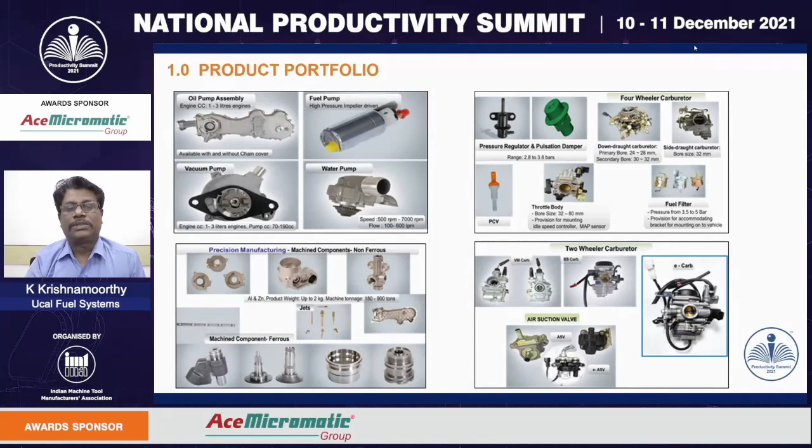With respect to two-wheeler, we are supplying carburetors, and recently we are supplying an innovative solution which is called e-carburetor. We are going to talk about the complete system in this presentation. In four-wheelers, we are there with almost all customers. In two and three-wheelers, we are with Bajaj, Hero and also Honda. These electronic carburetors, we are supplying to Bajaj.

Our team members: I am K. Krishnamoorthy, as already explained, heading operations, also one of the champions for this product. My colleague, Mr. Asokan, with me, is head of engineering, and Mr. Murugan, who has done an innovative product, is from R&D. Our valuable contributing team members are also given. Let us talk about the problem.

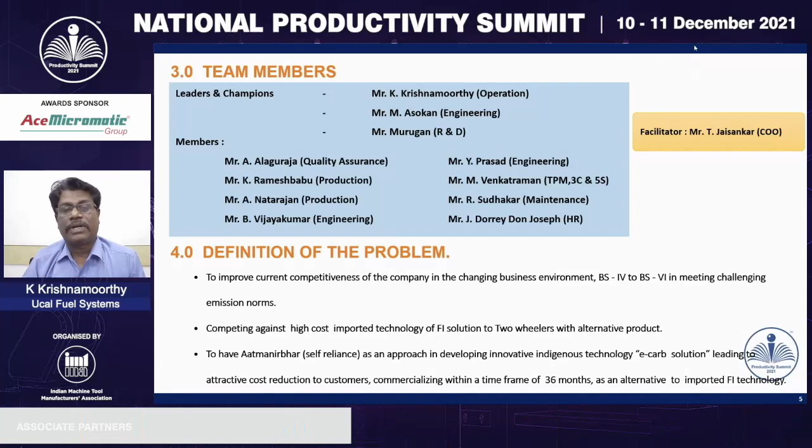To improve the current competitiveness of the company: the changing business environment from BS4 to BS6 in meeting challenging emission norms, competing against high-cost imported technology of FI solutions for two-wheelers with an alternative product, to have Atmanirbhar, self-reliance, as an approach in developing innovative technology for e-carb, leading to attractive cost reduction to customers, and commercializing within the given time frame, say 36 months. It is an alternative to imported technology.

The solution was implemented through product, process, and people. With respect to product, as I already informed, this is an innovative e-carburetor. It is a patented technology approved by ARAI, and the customer also accepted this technology. This product has been developed through various stages, right from quality function deployment, multiple environment over-stress testing, short-term and long-term endurance tests, and reliability engineering. Customer field proving and approval is also, of course, very important, which we have done.

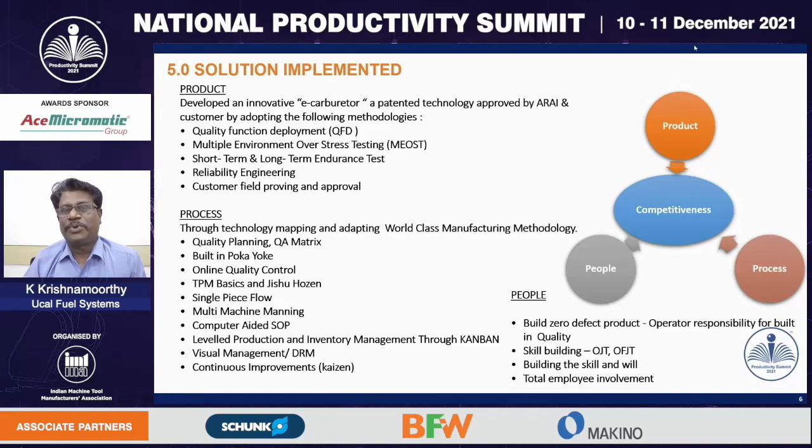With respect to process, all the product characteristics have been transferred to the process through our skilled engineering team. We started with quality planning, and we have also done a QA matrix, built-in poka-yoke, online quality control, TPM basics, specifically followed Jishu Hozen, single piece flow, multi-machine manning, and computer-aided SOP. We also did leveled production through a Kanban system and visual management. Of course, the DRM has played a major role in all the improvements, along with continuous improvements through Kaizen.

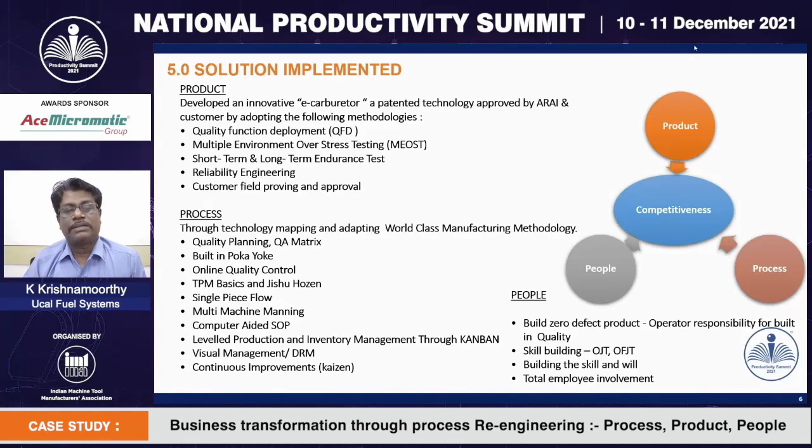With respect to people, skilled, trained people are very important. So we developed on-job and off-job training. A lot of manuals have been prepared for training the people. With respect to the value creation results achieved, we achieved excellent results in almost all measurables and all parameters. If we had not come out with the e-carburetor solution, Plant 6 would have been only 9.6 crores for the year, leading to non-viability of running this plant. So this project is life for us.

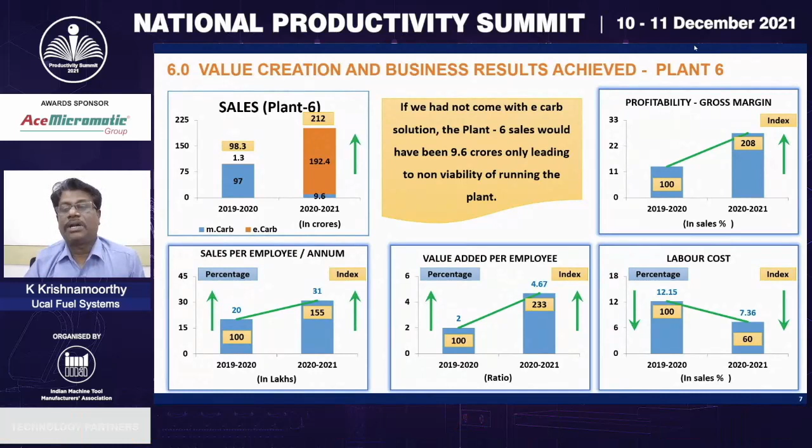So let us talk about the results. With respect to sales, we have gone from 97 crores in 2019-20 to 192 crores. It has almost doubled. With respect to profitability, I'm talking about the index, from 100 to 208, almost doubled. With respect to sales per employee, from 100 to 155, that is, from 20 lakhs per head we have improved to 31 lakhs per head.

Another significant result is value added per employee, which was 2, now it is 4.67. Our labor cost has come down drastically from 12.15 to 7.36. With respect to other parameters, customer line rejection, which is key for our company's business, we have reduced from 210 to 63.

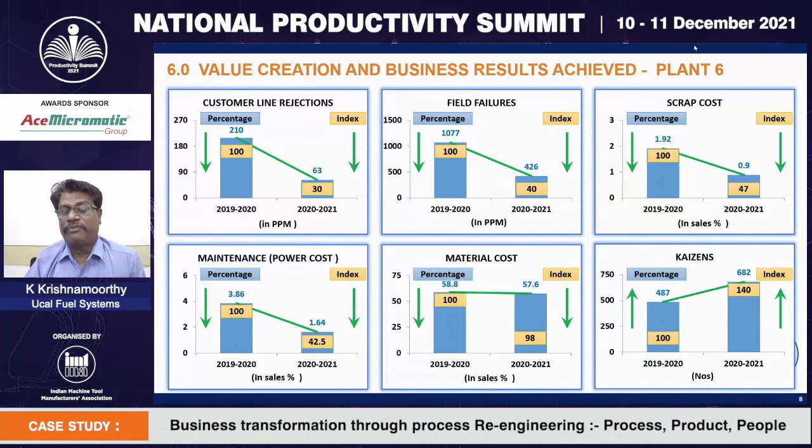Of course, the field failures have come down drastically. Scrap cost, one of the significant major reductions, was at 1.92%, almost 2%, and we have reduced it to 0.9%. With respect to maintenance, another significant improvement, reduction in power cost from 100 to 42.5, which is a very significant achievement. Of course, material cost has also been reduced.

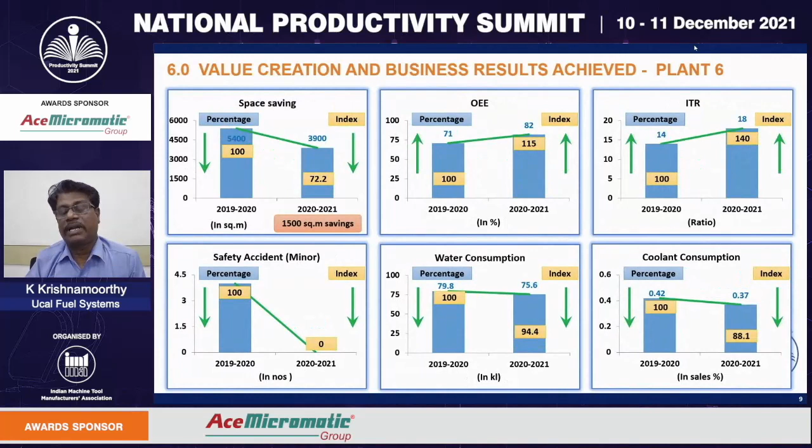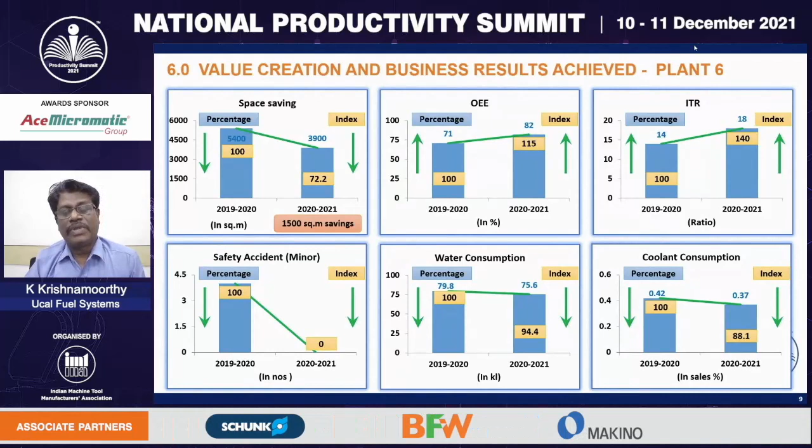All this improvement has been done through a number of Kaizens and space saving. We have saved about 1,500 square meters when we complete business re-engineering. Another significant improvement in OEE, from 71 we have gone to 82, ITR from 14 to 18, and safety almost zero—we have started monitoring near misses also. Water consumption and coolant consumption have also been improved.

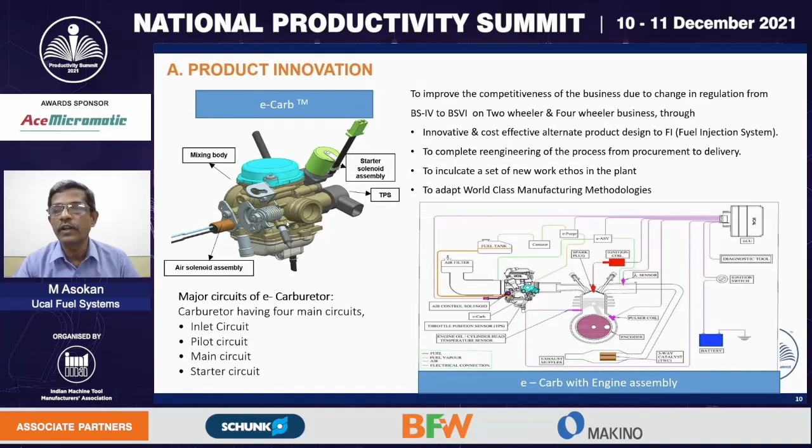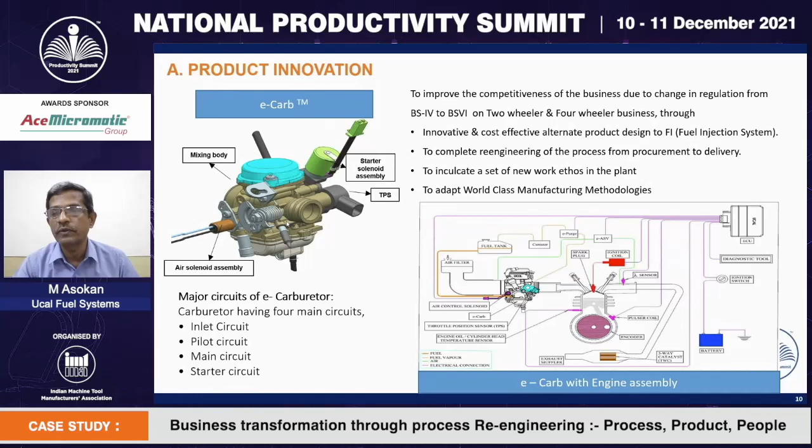This innovation was made a reality through an innovative and cost-effective alternative product design against a fuel injection system, with complete re-engineering of the process from procurement to delivery, inculcation of a new set of work ethos in the plant, and adaptation of world-class manufacturing methodologies. The air solenoid assembly is the key element in our electronic carburetors, fitted on the pilot air circuit to control the air-fuel ratio.

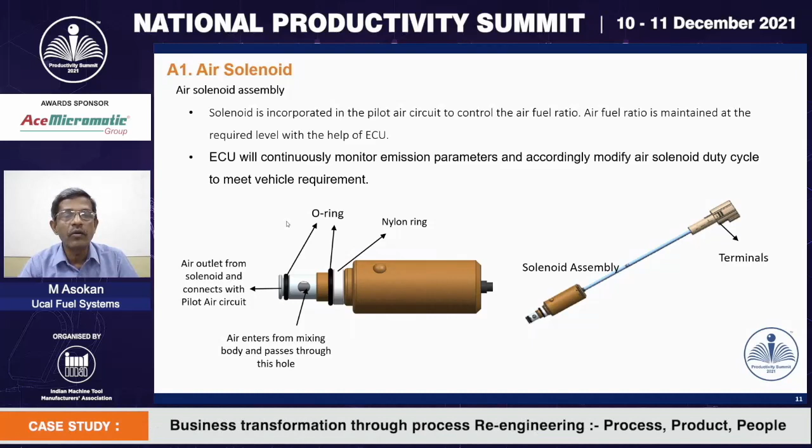The air-fuel ratio is maintained at the optimum level with the help of the ECU. The ECU continuously monitors emission parameters and accordingly modifies the air solenoid duty cycle to meet vehicle requirements.

Now, the comparison of electronic carburetors versus mechanical carburetors. The mechanical carburetors are made to meet BS4 norms, while the electronic carburetors are made to meet BS6 norms, and are also competitive with fuel injection systems. Fuel injection systems are more expensive compared to electronic carburetors, by around 30%.

The electronic carburetors are user-friendly in terms of servicing, as they have been in use for a very long period of time, whereas FI systems have multiple electronic sensors which make them complicated to service. As far as emission norms are concerned, we are at BS6, and we are happy to say our e-Carbs have met within 30% of the BS6 emission norms.

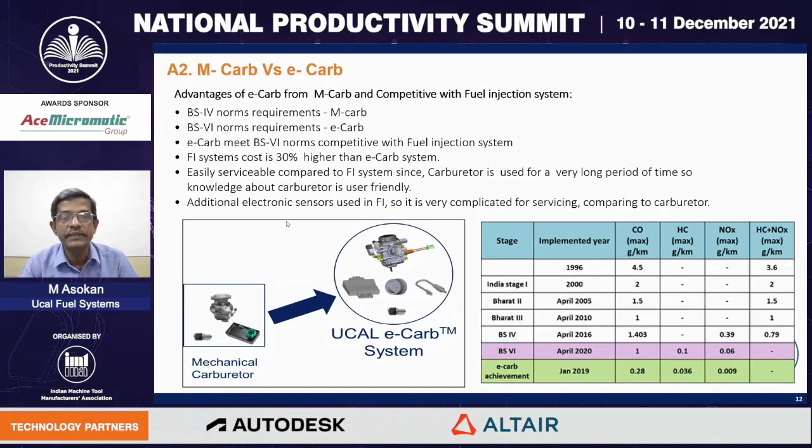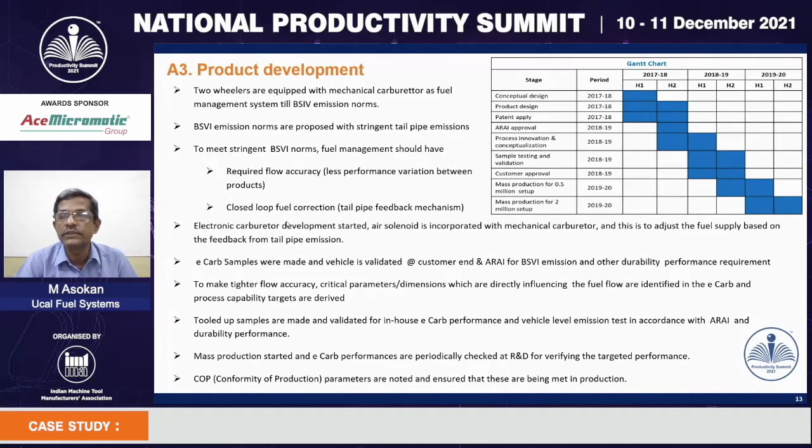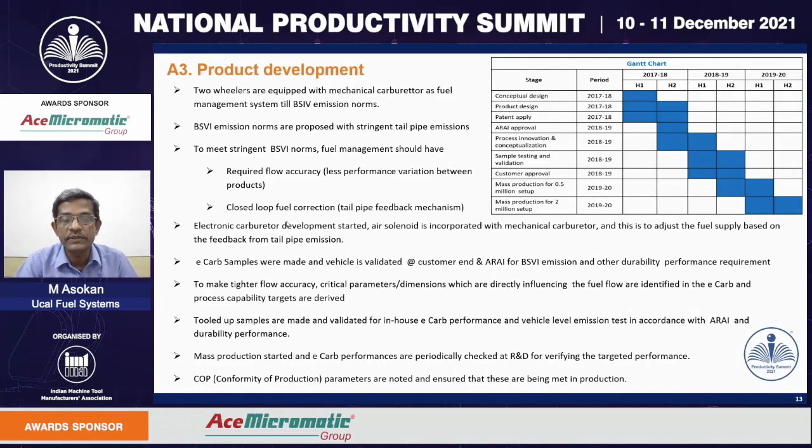As far as product development is concerned, we started our conceptual design during the first half of 2017-18, and completed the mass production setup with 2 million volume capacity in the second half of 2019-20, meeting the customers' quality, specifications, and ROI requirements.

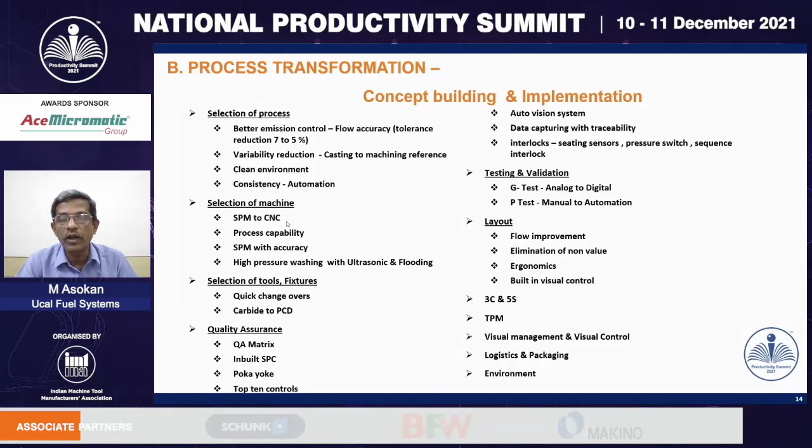As far as product process transformation is concerned, our focus was on selection of the right process, the right machines, and right toolings and fixtures, establishing the right quality systems, optimization of testing and validation protocol, and optimization of the layout. As far as selection of process is concerned, the key requirement was better emission control, meaning we had to reduce flow accuracy from 7% to 5%, which was there in our earlier mechanical carburetors.

This was achieved through various case improvements and process improvements. One of the process improvements was variability reduction in the casting-to-machining reference. In our earlier versions, we were taking casting as the datum for machining, which was resulting in inconsistency in process capability.

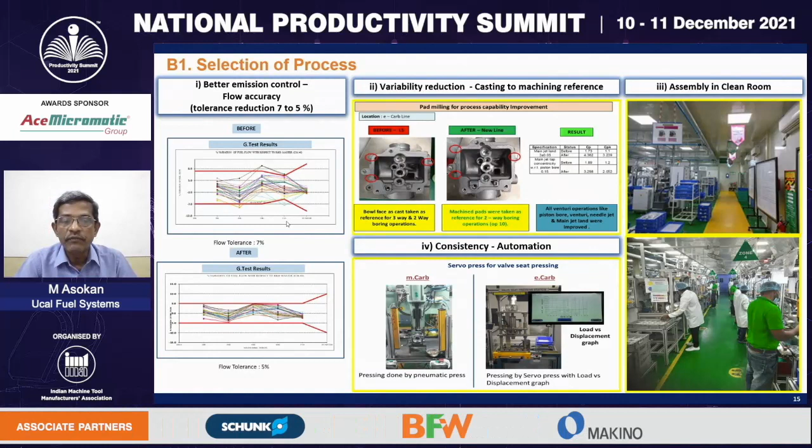In our eCarb, what we have done is take 3 reference points as the datum. We have done the machining, and that was used as the reference for subsequent operations. This has resulted in significant Cpk improvements. We have also ensured that assembly is done in a clean room, which ensures the right quality product is manufactured.

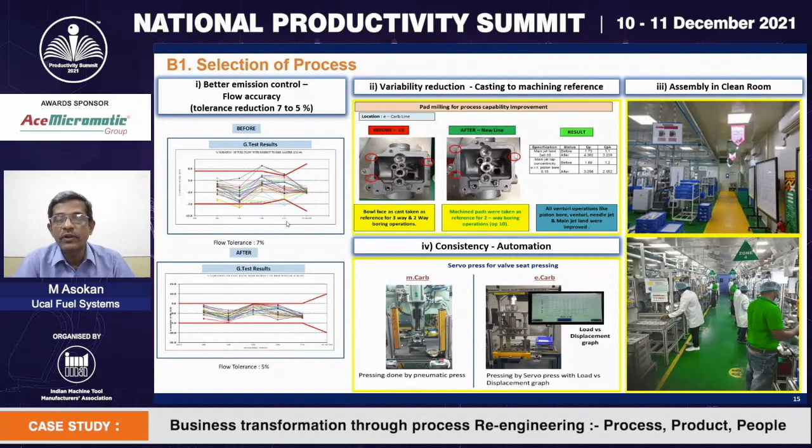In terms of the machine valve seat pressing operation, where load and displacement are very critical, earlier we were using a pneumatic press in which it was difficult to control the load and displacement. We have moved to a servo press in eCarb, by which we ensured that load and displacement are controlled, and we could also generate a load versus displacement graph.

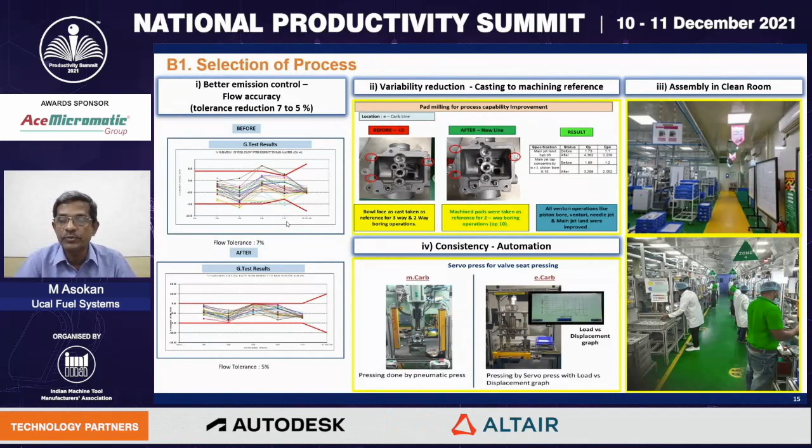The selection of the right machines. As far as machining is concerned, earlier we were using SPM machines. With SPM, the process was not flexible. Supposing the product becomes obsolete, we will not be able to use the machine for further product development. So consciously, we have gone for CNC version of machines in eCarb, which was very flexible, with quick changeover.

And wherever it is inevitable to go for SPM in assembly areas, we were using standalone SPM assembly machines. In fact, in one operation, we were using 3 different SPM machines for 4 operations. All these 4 operations were combined together into a rotary machine with auto part feeding. This has resulted in reduction of operator fatigue and improved productivity.

In fact, I have a small video I can show you.

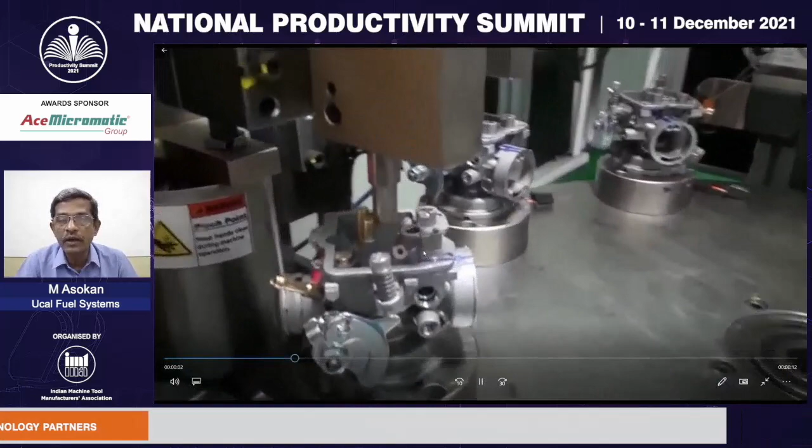Here what happens is only loading and unloading is manual. Everything else is automated, and the child parts are fed automatically. There are part presence sensors and multiple interlocks and poka-yoke features. This has helped in reduction of operator fatigue and improved productivity.

And all these improvements have significantly improved our process capability. In the table, we have listed 11 process and product parameters where significant improvement in process capability has been achieved, from less than 1.5 CPK to greater than 2.

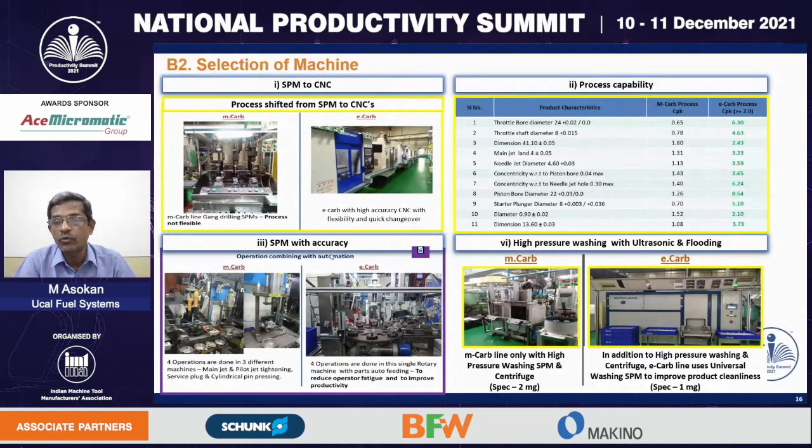As far as our final washing is concerned, earlier we were using only high pressure washing with a centrifuge, where we could achieve only 2 mg cleanliness level. We have introduced a universal washing machine with a flooding system followed by ultrasonic washing and a vacuum drying cycle, by which we could improve the cleanliness level to less than 1 mg.

As far as tool selection and fixtures are concerned, we have gone for tool life management with interlock, which ensures that the tools are changed at the right time and the right tool is selected. This has significantly reduced the tool change time.

And we have gone for a combination of tools. Earlier, we were doing multiple tools for different operations - for example, roughing, finishing, and face milling were done with different tools. All these 3 were combined together into a single combination tool. This has resulted in significant process parameter improvement and cycle time reduction, which has resulted in capacity improvement.

And as far as fixturing is concerned, we have gone for seating sensors with interlock, which has helped in prevention of a defective part from being produced.

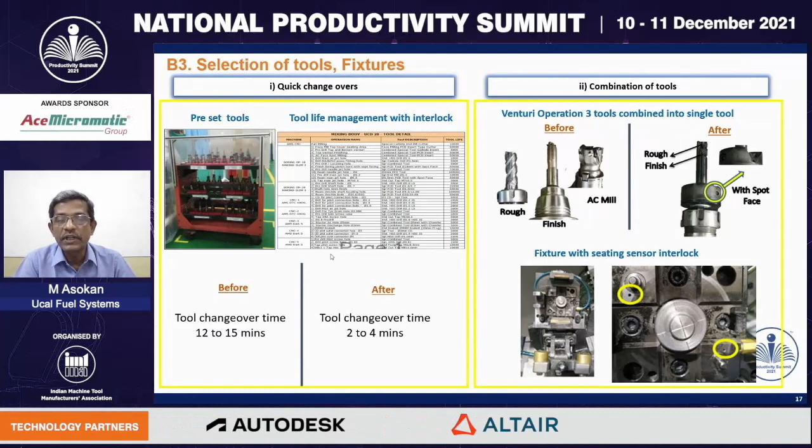With that, I'll hand it over to Mr. Krishnamoorthy, who will take it forward and conclude.

Thank you. Now let us talk about how our product quality characteristics have been transferred for quality assurance. We started with quality planning and the QA matrix. The complete process is deployed through the QA matrix system. We have done process characteristics wherever required, with inbuilt SPC, and more than 240 poka-yoke implemented throughout the manufacturing process.

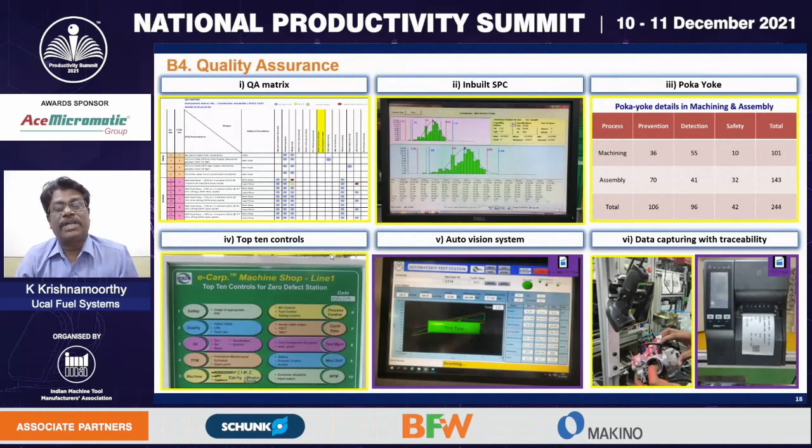One of the intuitive methods of controlling the process is the top 10 controls, starting from safety, quality, 5S, TPM, and machine management. We have also done process control, cycle time related issues, tool management, man-skill and material flow management. This is called top 10 controls, implemented at each stage.

And wherever manual reference or manual method of inspection existed, it has been transferred to automation. I'm just showing one video.

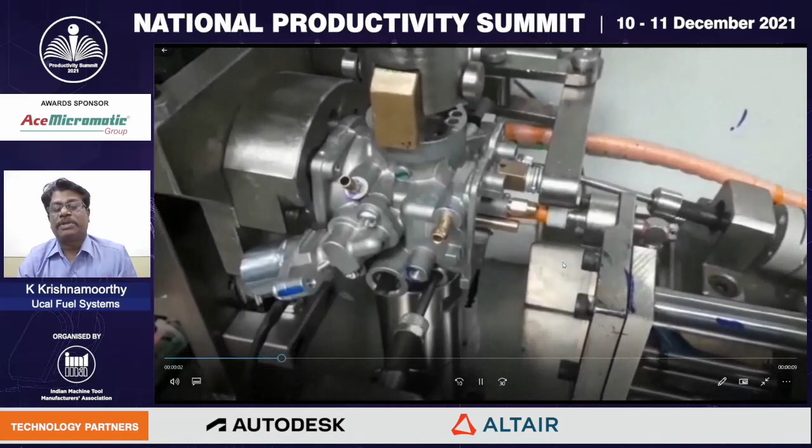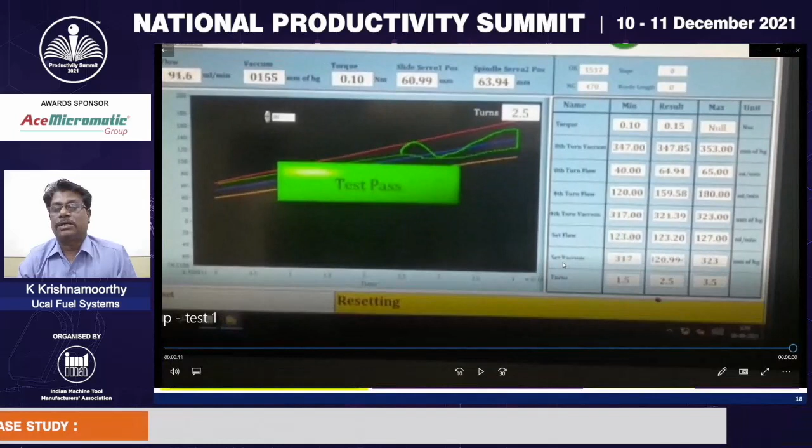Previously we used to adjust all the screws for flow measurement manually, and now this is completely automated - all the graphs and flow values are traced automatically, and the data is stored in the system. This is an excellent automation which has created value to the customer by not sending defective parts.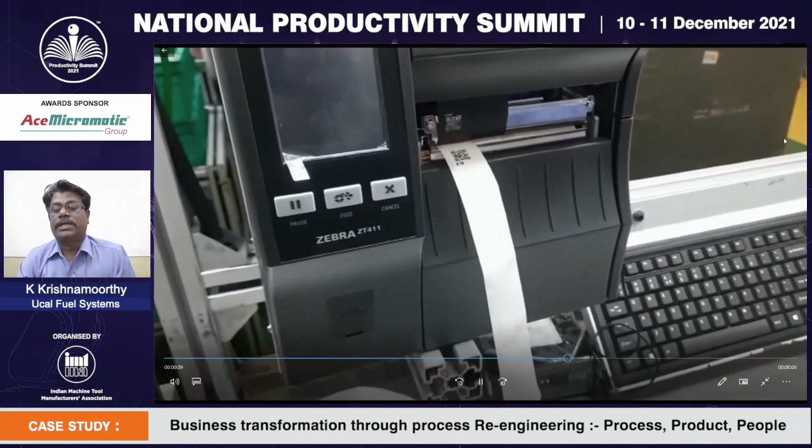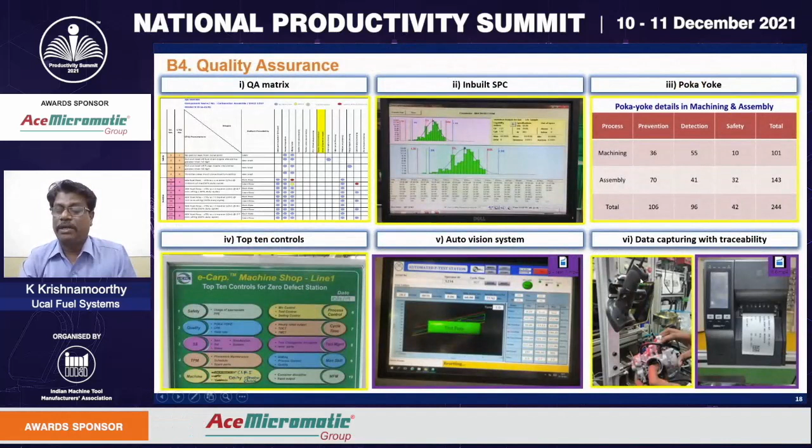All parts are getting passed, then a sticker is generated, and this sticker is pasted on the product, only then is it dispatched. So whenever we need to refer to anything, we just scan this QR code and can notice all the details. This is another excellent sub-project we have done in the process - of course, testing and validation was previously manual.

This we call it as P-test, and for our understanding, we can say it as idle testing. For idle testing, we used to do manual, now we have completely automated. And similarly, the final test before dispatching the part to the customer, the product is tested

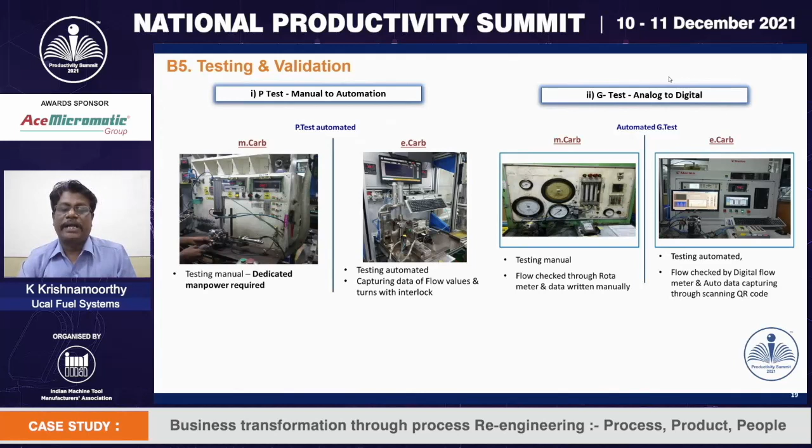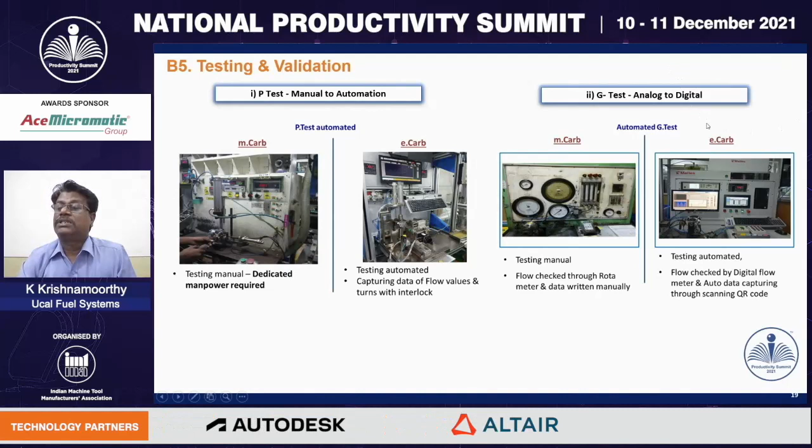through gasoline test, we call it G test. In this, right from the idle test, 20, 40 kilometers per hour, then 60, then full open, all the stages have been tested previously using manual. We used rotameter and data written manually. Now this system is completely automated and the flow is checked by digital flow meter and auto data capturing through scanning the QR code. This is another significant improvement in our process.

Thanks to our production engineering team.

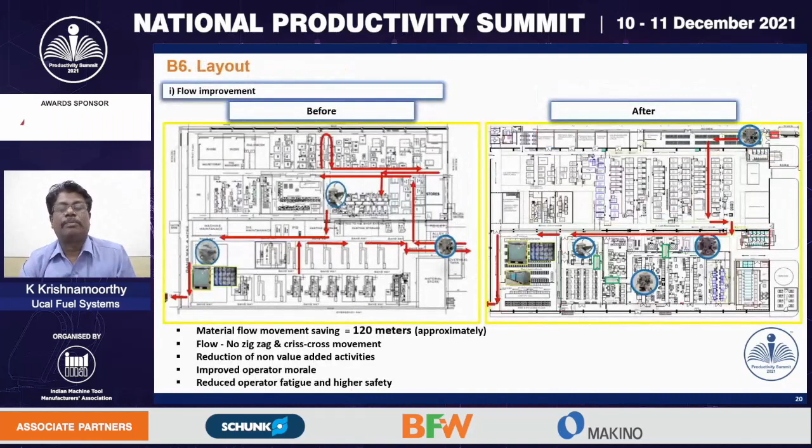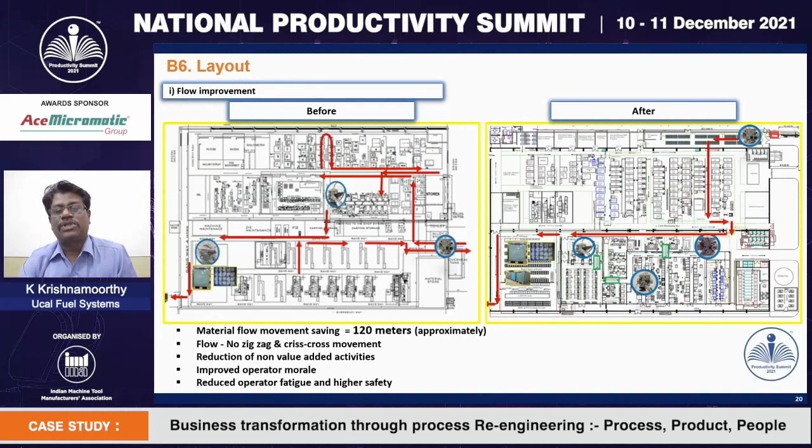Now coming to the real implementation of the complete process through layout modification. We had almost 120 meters of non-value added activity, and the flow was previously zigzag. The parts were coming and again going back. All this issue was there. Material handling was very difficult. Now you can see the process is very simple. The material is inward at the right corner and it is dispatched at the left stage. So this is another significant improvement which we have done in the layout.

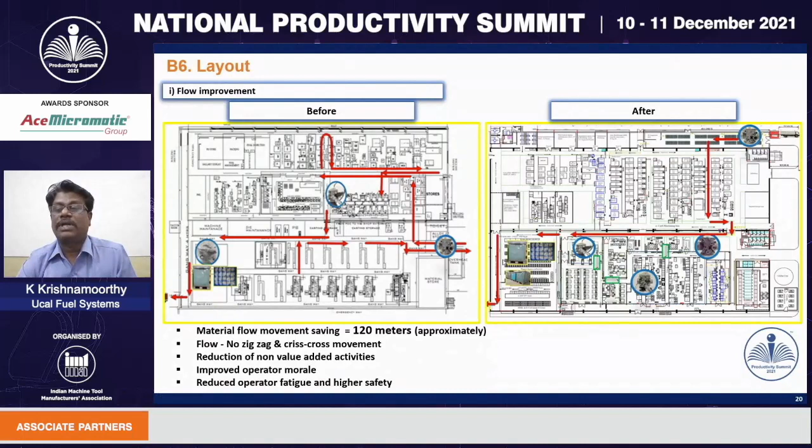Now with the layout, we have also built in a lot of systems, like visual controls. Material used to transfer through manual trolley from machine shop to assembly, then assembly to testing, and testing to packing. Now it is automated through a chute system. So this reduced a lot of fatigue in the system.

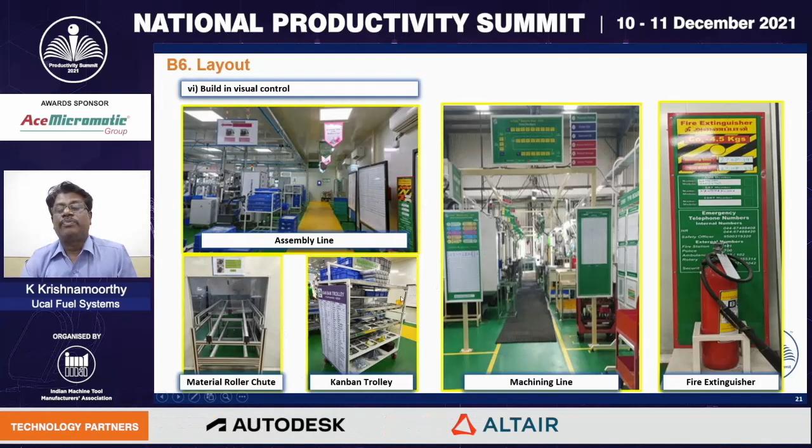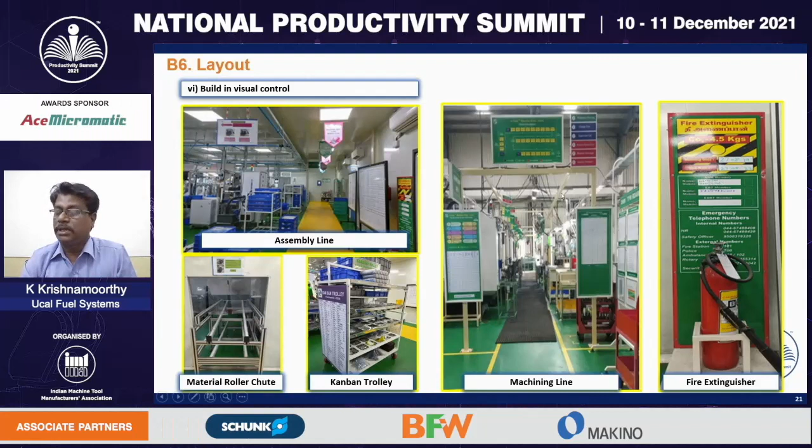And you can see the Kanban trolley, we have reduced the size of the parts. We have reduced to 200 numbers. Each 200 numbers, the trolley is fed to the assembly line, so the inventory has been reduced and ITR has been increased drastically. Similarly, the machining line, all visual controls with the bin built into the system, and given high priority to our safety systems.

Of course, all this requires great system effort. TPM and DWM has played a major role in implementing this manufacturing system. In TPM, we have taken 3 major pillars. One is Jishu Hozen autonomous maintenance, another one is quality pillar, then PM. These 3 we have taken seriously, and we have implemented all standards.

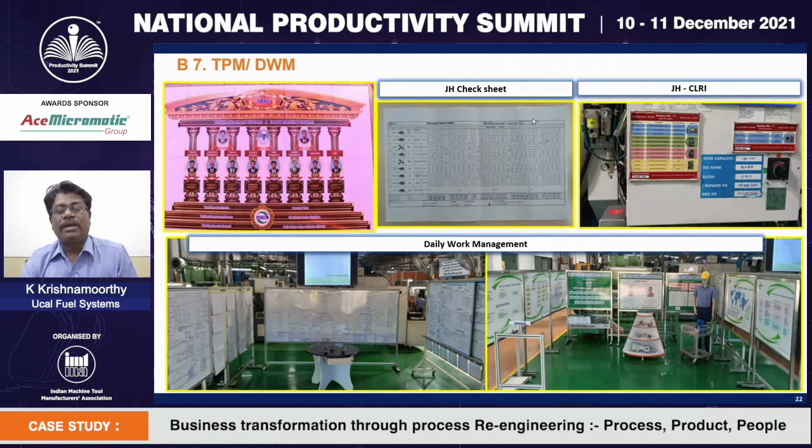And another major improvement we have done is on daily work management. We have split daily work management into 2 things: one is proactive, another one is reactive. For proactive, we are measuring more than 150 measurables every week, so that whatever is going red, we only take action on. All the others that are green are already okay.

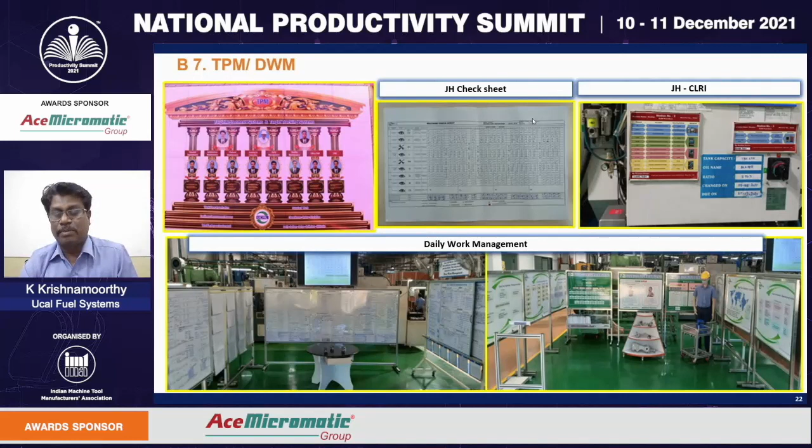With respect to the reactive system also, every day we analyze what has happened the previous day, and do why-why analysis, root cause analysis, inspection side, cost side, correction, corrective action, preventive action. All these systems are analyzed and a daily action has been taken. That is why we have achieved this much results.

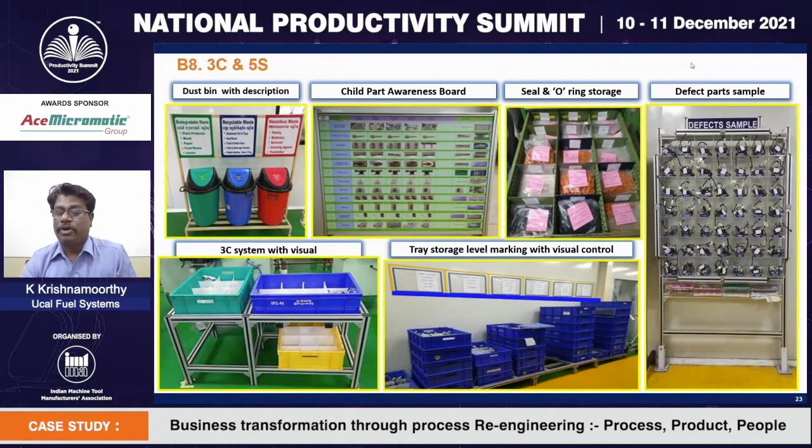And as I already informed, all the systems have been built into the process. 3C and 5S is the key for any success, so we have implemented this throughout the system. For visual management, we have further introduced line status board and defect status board, the operation details, cycle time, takt time, etc., process flow diagram. All have been implemented. Another major area is logistics and packing.

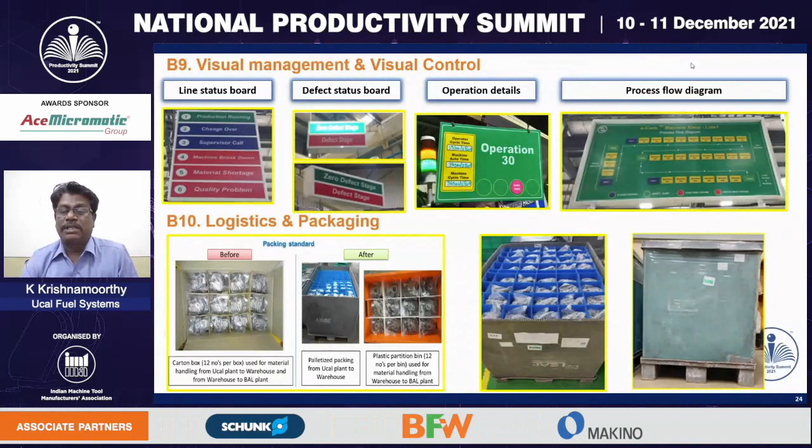We used to have a lot of damages in the product. We had some 0.05% rejection in this. Initially we changed from crates to carton box to crates, but still there was a problem. Now we have found a solution which is completely palletized, so our damages have become zero now, and the product quality has been improved. Of course, the periphery also improved.

The employees are satisfied by looking at the plant. So all the green belt development has been done throughout the plant.

Now coming to people selection, we selected experienced, talented, motivated, and knowledgeable team, because this project is life for us, going to be very critical. We selected key people from other plants also, and gave a lot of inputs and training, so that the total system has been taken care of by people. And employee involvement, of course, Kaizen is a key, and 5S is a key.

So every month we are appreciating the employees through a proper Kaizen method. And with respect to 5S, we have done 22 subzones. I am heading the 5S organization, and every month the top 3 best zones are identified and awarded. So throughout the plant, the 5S culture is developed.

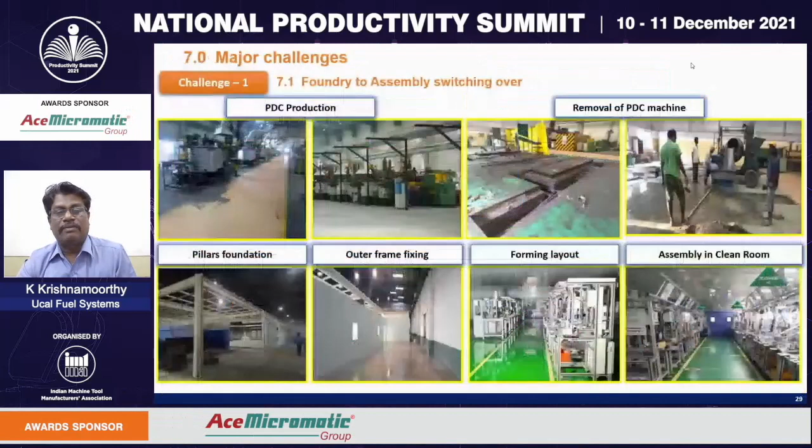And we did not stop with that; to improve the morale, we created a volleyball ground. Even I used to play with the employees. And with respect to medical camps and social responsibilities also, we have taken them seriously and implemented a lot of activities. Now, let us talk about the major challenges.

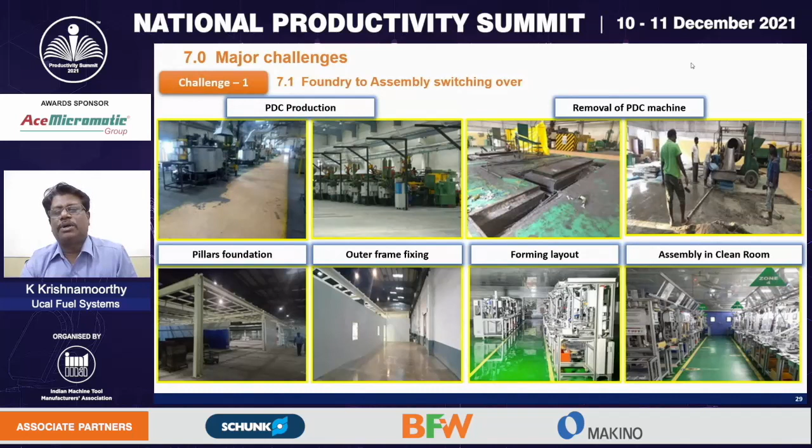The first challenge is the foundry to assembly switchover. You know how difficult it is converting a foundry shop to a dust-free assembly shop. We have met several challenges, and we have done a complete changeover within the given time, and even customers appreciated this effort.

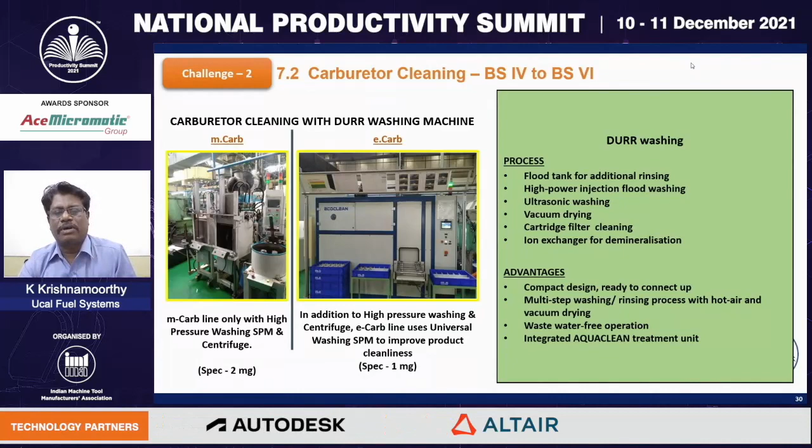And coming to challenge 2, carburetor cleaning. My friend Ashokan already explained the criticality of carburetor cleaning. So we have introduced an innovative solution called flood cleaning, and the product quality is improved from spec 2 mg to 1 mg. This is another significant one. I already informed about the several sub projects we have made, roughly around 35 to 40 sub projects. This is one of the sub projects among all these.

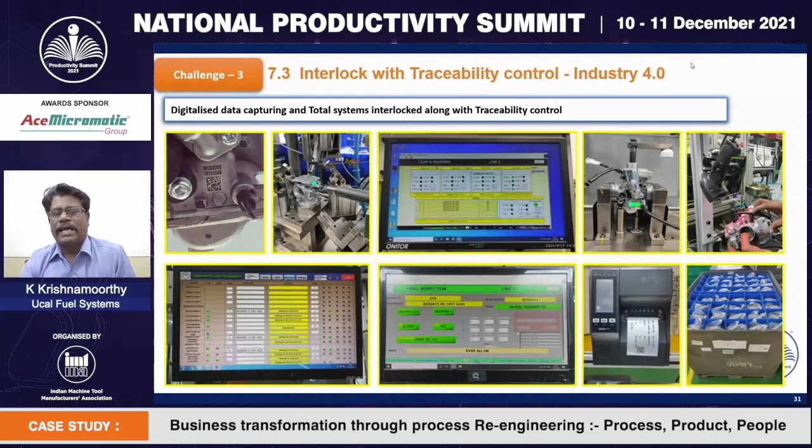And next, coming to another challenge, interlock and traceability. That's linked to Industry 4.0. Right from the QR code printed on the carburetor through laser marking, all throughout the system, we implemented scanners. From the scanner, the data is captured and stored. Whenever required, it can be retrieved. So this is an excellent example of how the complete system is interlocked and a traceability system is created.

And in the final stage also, you can see even the packing. Only when all parts are okay in all the stages will the packing sticker be generated with the product details, and then it is pasted.

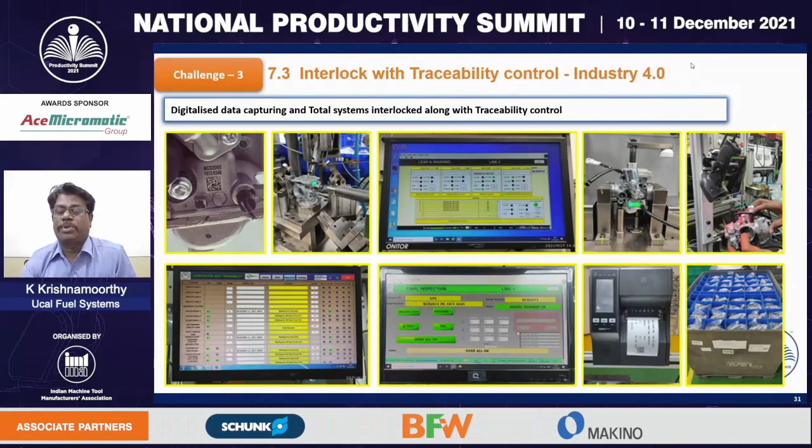Now let us talk about challenge 4, supplier development. Input material is the key for doing all these improvements, so we have concentrated on suppliers also. We called them, met them, and gave training. Our COO, Mr. Jaishankar, has given a lot of awareness and training to the people, and we have developed a number of manuals so that incoming products also improved.

Now let us talk about how we have ramped up. Because this product is innovative, a number of process innovations have been done. Now the question is, everything is good and fine, but how are we going to achieve the customer requirement? Because the time frame is very short. So we started with roughly about 1,000 numbers, and the customer gave approval. Then in May 2020, we made only 19,000 numbers, whereas the customer asked for 2 lakh carburetors per month. From 19,000 to 2 lakhs, continuously.

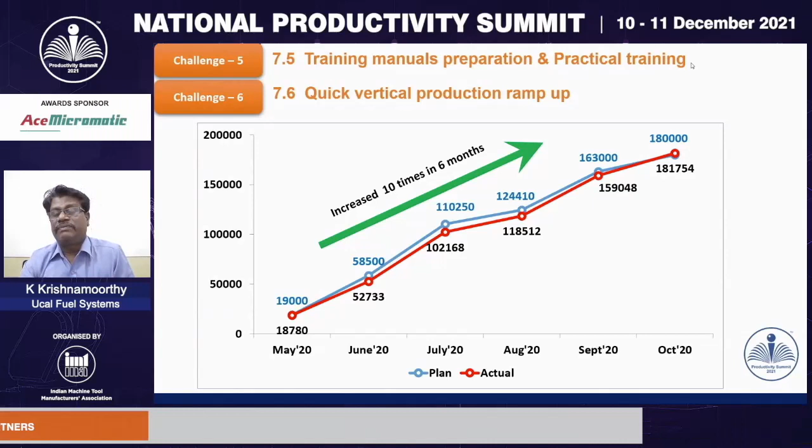I already informed the product is innovative. The process also we are developing in parallel. Testing and validation are all going on. Meantime, we need to meet the customer requirement also. You can see within 6 months, our production has increased 10 times. Our team, right from 5 o'clock in the morning till the end, with interest, our entire team has contributed to these mass production improvements.

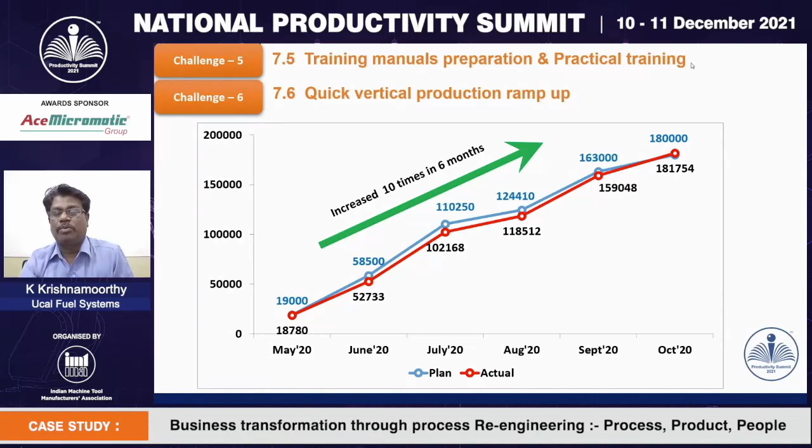So finally, we received appreciation from Bajaj Vice President Material, Mr. Karambelkar, who gave tremendous appreciation, and the Bajaj senior management also gave tremendous appreciation to our team. And finally, we achieved 1 million carburetors within 1 year; it's a big challenge. With the top management, we celebrated in the plant with all our employees how we achieved 1 million carburetors.

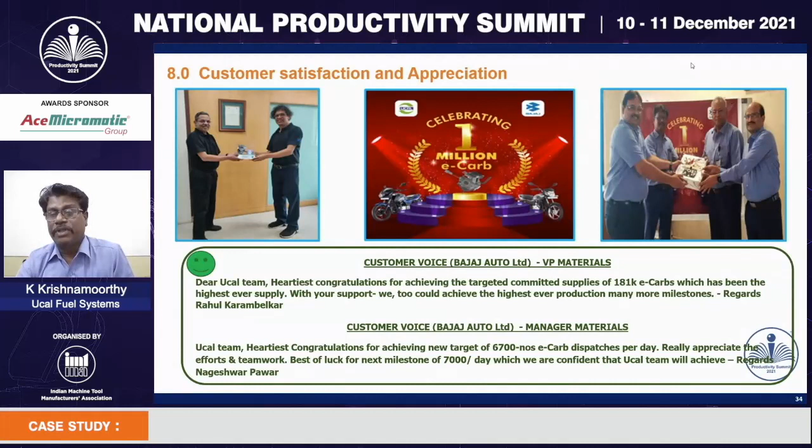Now the situation is different. Now we achieved 2 million carburetors, which is of great significance: innovating a new product, innovating the process, and then doing this 2 million mass production is really a challenge. Now what is next in future?

Now further we need to improve our OBD2 product and process technology so that we can continue our market share. And with respect to process, we need to concentrate on further automation. And with respect to people, nowadays electronics are incorporated in mechanical carburetors, so we need electronic engineers and mechatronics, and also expertise in lab software. So we are going to provide all these things.